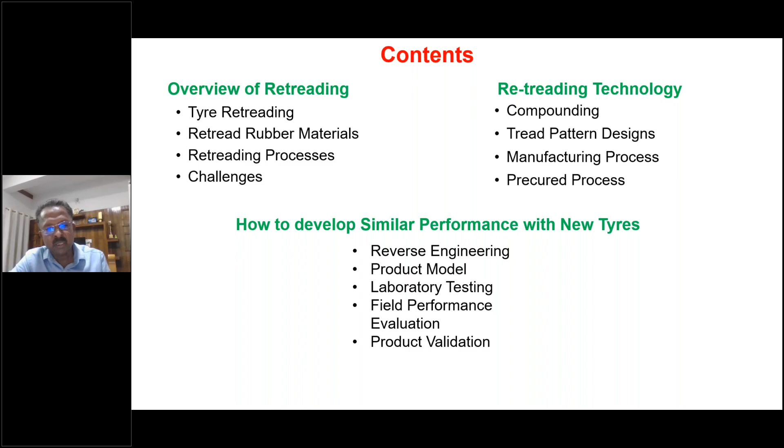In retreading, as you know, when a tire is worn out, maybe after 50,000 kilometers or even 1 lakh kilometers, we have two options: we can go for a new tire and replace it, or retread it—just replace the worn out portion of tread with a new piece of rubber, giving the tire a new lease of life. This process is called tire retreading, and the materials used for this process are called retreading materials.

The important retreading materials are: pre-cure tread rubber, which is fully designed and fully cured material; and hot rubber, an uncured slab material; and bonding gum, a thin layer of rubber film; and of course the solution and tire patches.

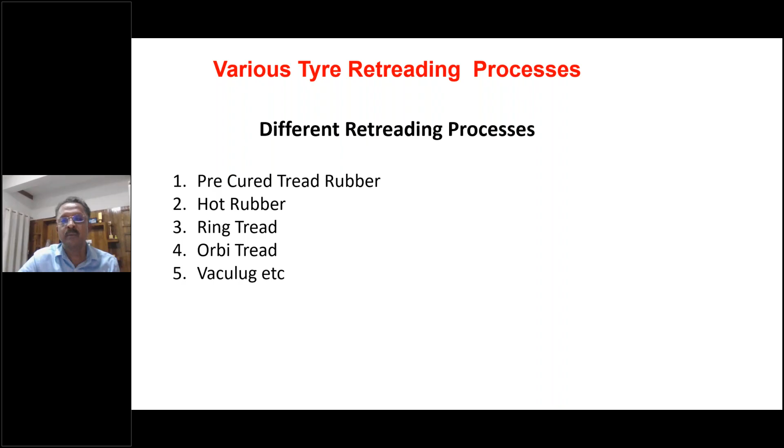There are different retreading processes: pre-cure tread process, hot rubber, ring tread, orbi tread, vaculug, etc. In the pre-cure process, the worn out tire is first inspected for defects, and it is buffed to remove the old tread pieces. After buffing, we apply a cement solution to the surface. Then after drying the cement, we place the pre-cure tread, a long piece of tread, and it is cured in an electric chamber or steam bonder.

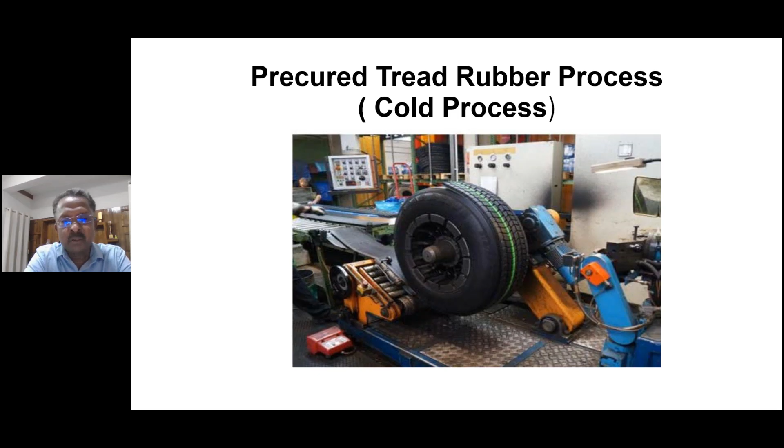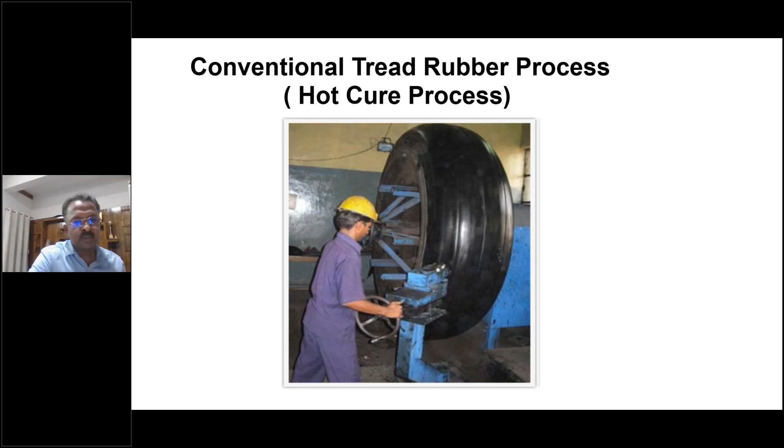In the hot cure process, the difference is there is no design—it's uncured material, not cured. It's a hot process because it needs more heat compared to the pre-cure process, which is a cold process.

Ring tread: the difference is we are placing a ring-shaped tread over the tire casing, so no splice is required.

Orbi tread is mainly used for OTR tires, big tires, where a small strip is extruded and wound over the buffed tire casing to the required dimensions, and then it is cured similar to hot rubber.

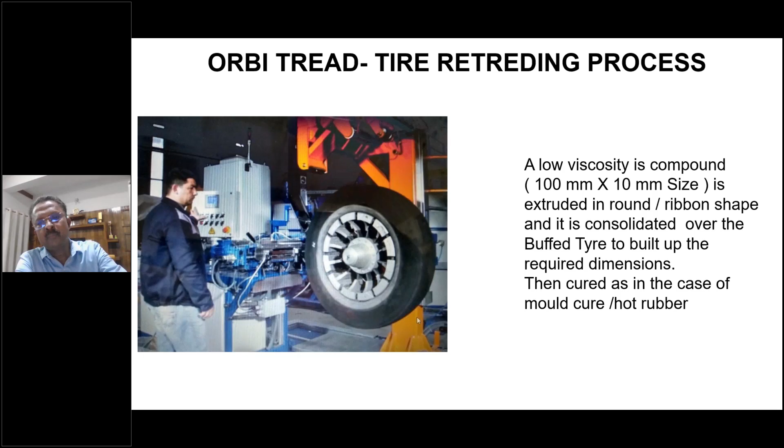Vacu lug is similar to hot cure. The difference is we are using segmented molds, so you get better uniformity.

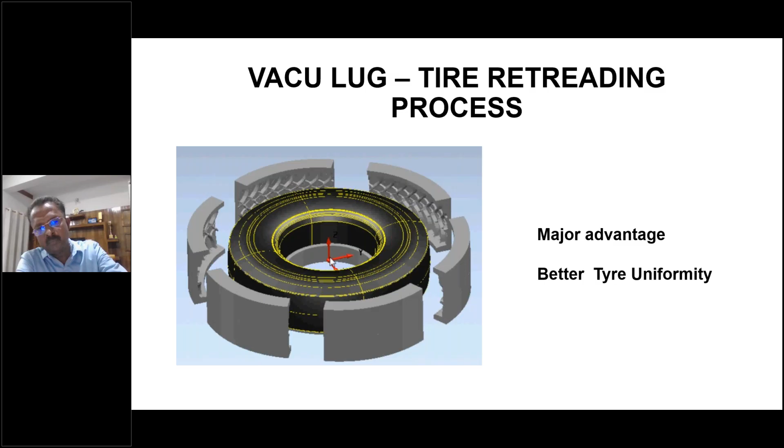Now the challenges in retreading: belt separation, ply separation, tread lift, channel crack, chipping, cutting, low mileage, and cost.

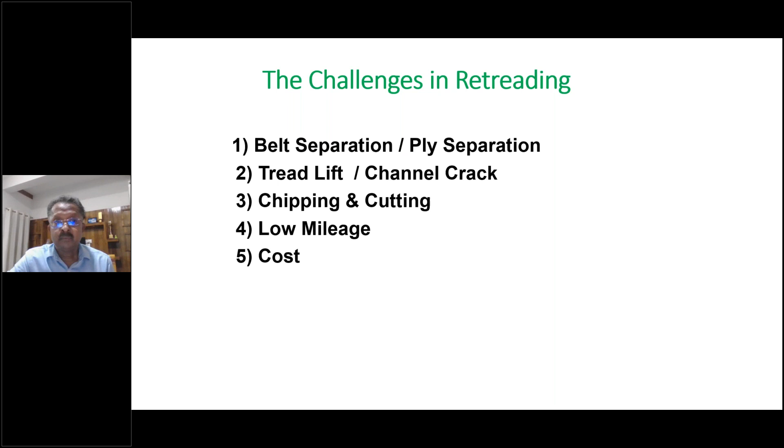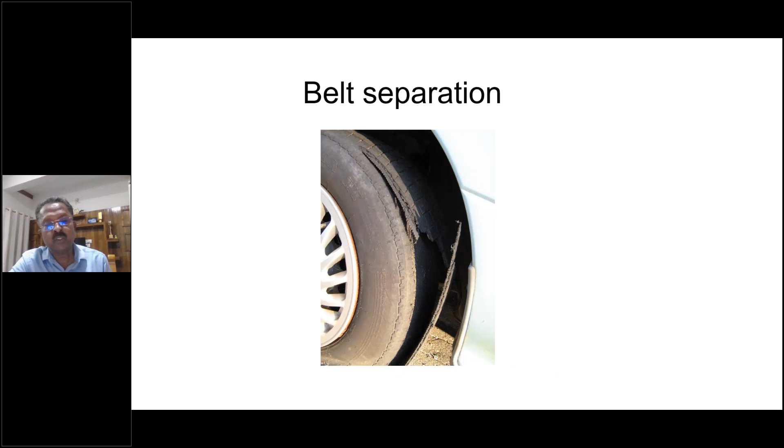Tread separation: the tread is totally separated from the tire. Belt separation: the belt gets separated. This includes breaker, inner ply, and outer ply separations.

Buttress crack: the crack develops at the buttress of the tire. Channel crack is the main complaint for retread rubbers.

A crack develops in the groove and it propagates around the entire circumference of the tire, and finally the tire gets separated.

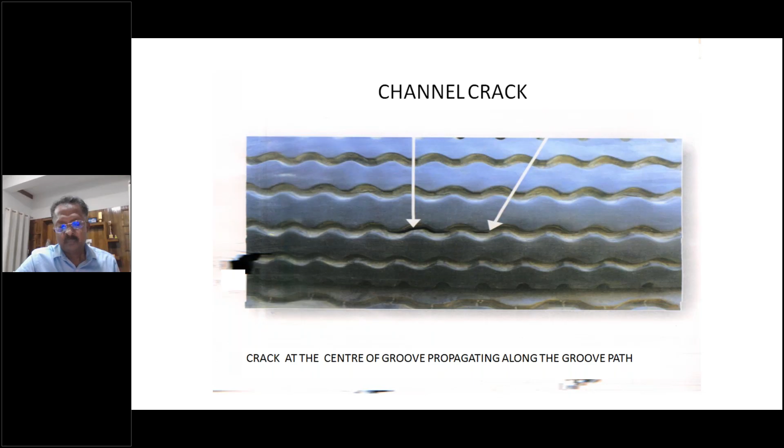Then there is tread shoulder separation and subsequent burst. If shoulder separation is not noticed, the tire will subsequently burst.

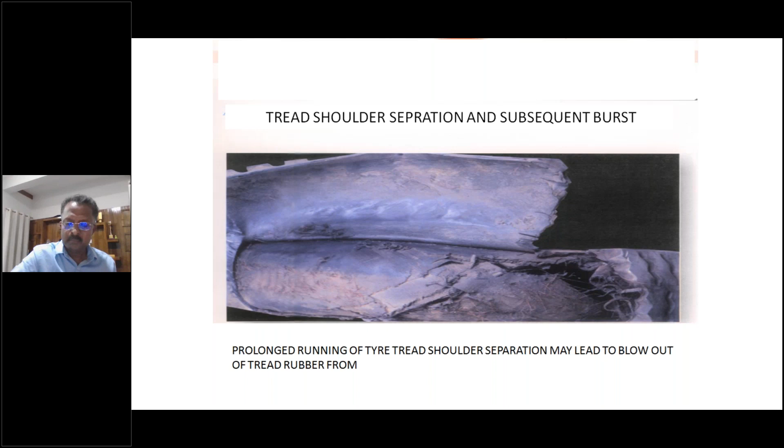Because of these aspects, even today, retread rubber faces challenges in the market in the following applications: long haul applications, where tires running long distances may fail; non-stop applications; and trucks carrying perishable goods like agricultural produce—apples, pineapples—where people travel long distances without stopping.

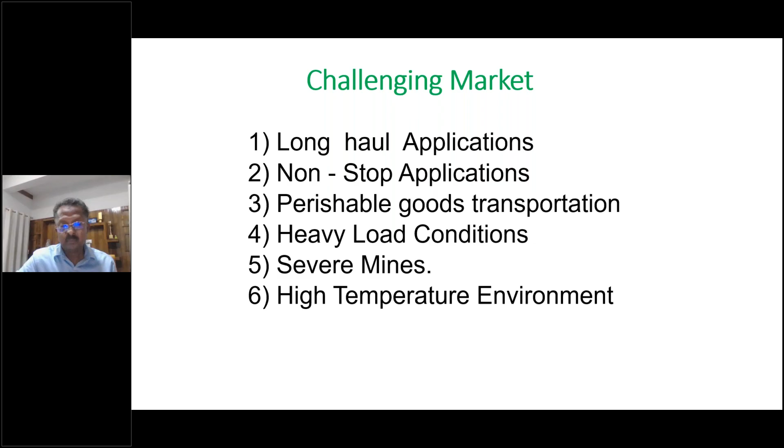And in heavy load conditions, there is risk—severe mines as well as high temperature environments. So for these applications, even today, retread tires are not preferred by all customers. These are the major reasons for retread failures.

So I classify into 4 aspects: one, the tire inspection failures, the quality issue of tread rubber materials, the retreading process failures, and tire vehicle operational issues. See, the inspection part.

The tire before retreading, we have to inspect properly whether the tire is retreadable or not. If the tire has major complaints, we have to stop. We are not supposed to retread it. If a tire retreaded having earlier defects, it may lead to problems. So the inspection is very, very important.

Maybe small cuts, air entrapments, if unnoticed, may aggravate after running, after retreading. Similarly, incorrect tire patch or even repairs that are not perfect may lead to retread tire failures.

And quality issue of retread materials: the selection of tread rubber size, its dimensions, type, compound, excess heat buildup. Generally in India, retread rubbers have good mileage potential, but the tires don't run for long distances because of excess heat buildup. Bonding issues, bonding gum reversion, poor tack of bonding, cement contamination - these all will lead to retread failures with respect to tread rubber material quality issues.

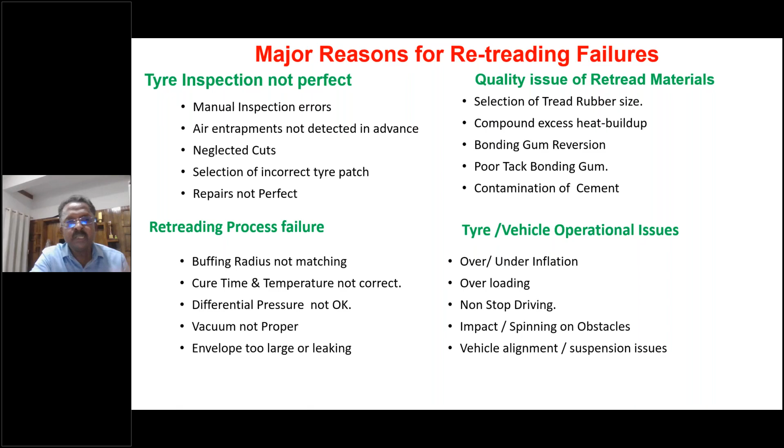Similarly, tire and vehicle operation issues: overinflation, underinflation, overloading, non-stop driving, impact, spinning on obstacles. Sudden impact on objects will cause failures. Similarly, suppose the tire is stuck on an object - if we accelerate, the tire will spin there itself, creating high heat and quality issues, alignment issues, suspension issues. So these are the issues for retreading failures.

Retreading technology applies the right combination of science, engineering, and art to develop a successful product meeting customers' requirements of cost, quality, and sustainability. It has three aspects.

It's the science aspect - the science of raw materials, the structure-property relationship of raw materials, the raw materials' physical and chemical characteristics. It has a great impact on product quality. Then engineering of process, the engineering of machineries, also has a very good impact on product quality.

And more important, the art of making the product. So these three aspects we have to combine to make a successful product. So retreading technology has these aspects: rubber compounding, tread pattern designs, manufacturing process, the retreading process, and of course education, training, and applications. Still, the awareness of people regarding retreading is limiting its usage in the industry, so a lot of education and training is required in this aspect.

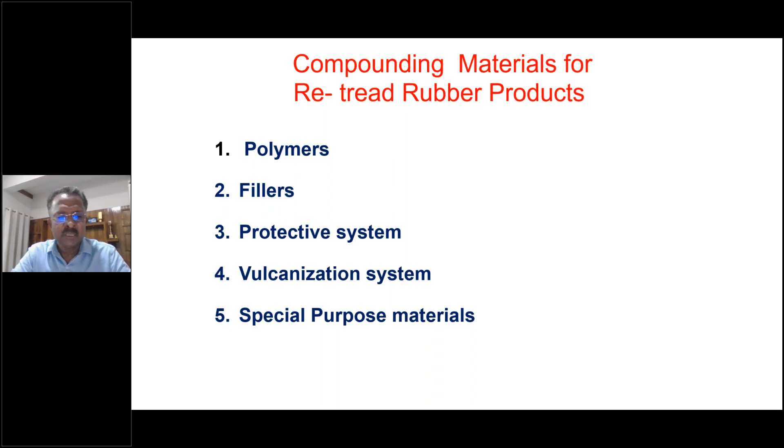Compounding - I'll cover a brief of compounding. The rubber compound basically contains polymers, fillers, protective systems, vulcanization systems, special purpose materials. For retread materials, for tread rubber, we can use natural rubber or a blend of natural rubber with SBR or PBR for a tri-blend. Mostly for highway application, we prefer a blend of natural rubber and PBR.

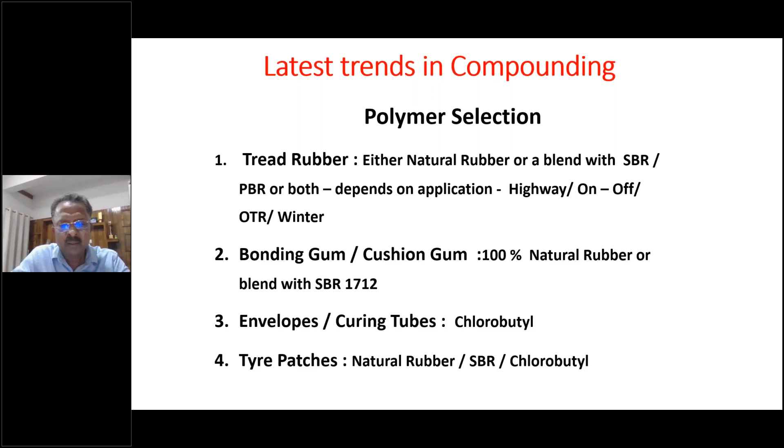Reinforcing fillers - these are the strength-giving materials, responsible for giving the tire strength. So for tread rubber, historically people used N330, N339, N220, and recently N234 blacks.

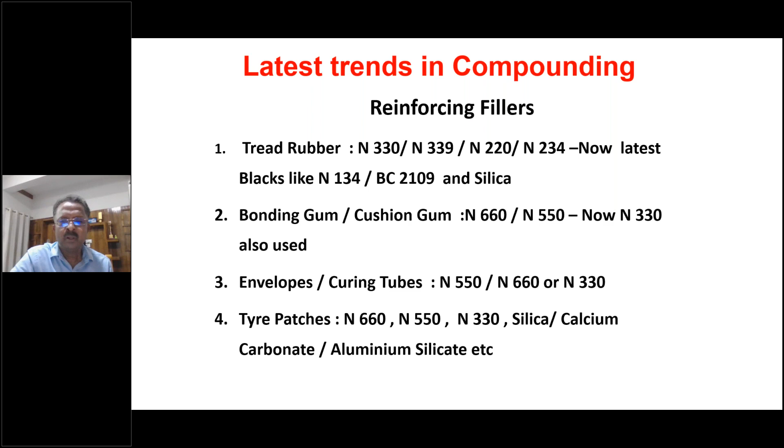And latest blacks like N134 we can use, or BC2109, or even silica we can use as reinforcing fillers for tread rubber. For bonding, mostly people use N660, N550, and we can also use N330. Envelope and curing tubes use N550.

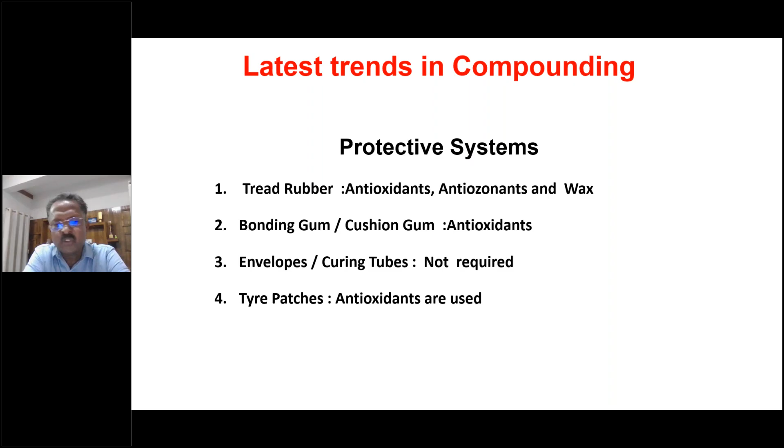Protective systems: for tread rubber we use antioxidants and wax. Bonding and cushioning mostly use antioxidants. Envelope, as it is chlorobutyl based, doesn't require it. Tire patches, antioxidants are used.

Then vulcanization systems. For vulcanization, it's always better going for low sulfur systems for tread rubber. Low sulfur systems will give you mostly monosulfidic crosslinks. Monosulfidic crosslinks means the link contains only one sulfur atom - this is more stable towards heat resistance.

And for bonding, for getting good bonds and storage life, we use insoluble sulfur. Envelopes normally use sulfurless curing, no sulfur. Tire patches use ultra fast accelerators, and even room temperature curing systems are used for tire patches.

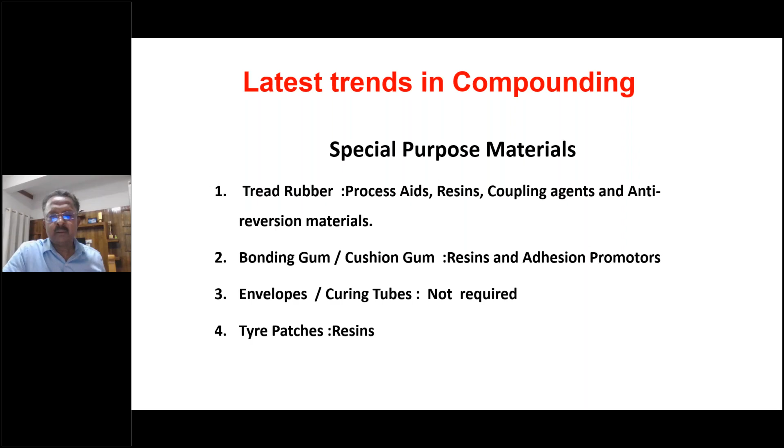Process aids or special purpose materials. There are materials like coupling agents, such as silane coupling agents, or anti-reversion materials used for tread rubber to get more life. Also bonding resins and adhesion promoters for getting better bonding.

Tread rubber quality has three aspects. One is the quality of the tread rubber material. Second is the quality of the retreading process. Finally, the application and operating conditions of tires.

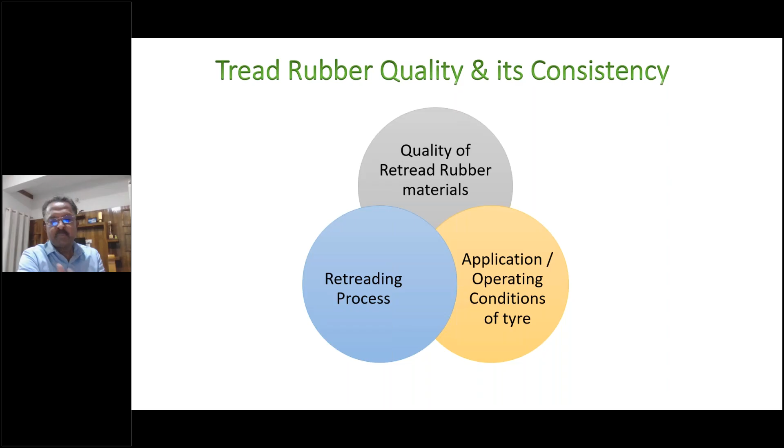The same tread rubber, same composition, put into two applications. On the highway drive application, long highway driving, it gets 100,000 miles, whereas a city driver gets only 10,000 miles. Same material under different conditions: one is non-stop, plain road, normal load, low temperature, leading to good mileage. The same material under different conditions results in one-tenth of the mileage. So mileage is a highly complicated phenomenon, depending on a lot of factors.

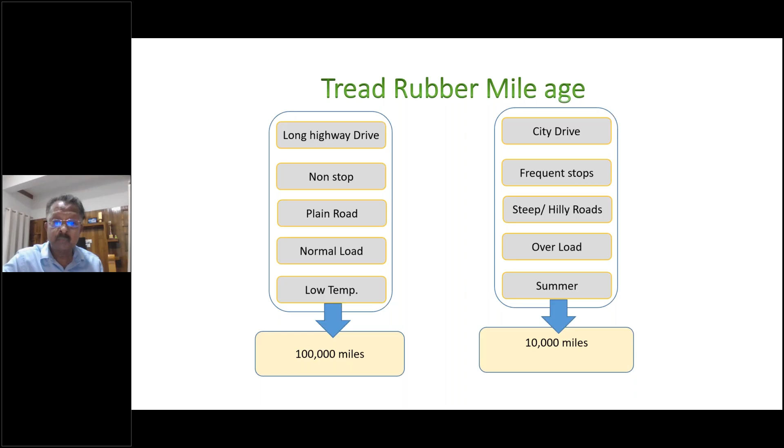The factors influencing tire wear are: driving conditions, road conditions, vehicle conditions, tire conditions, and design elements. In driving conditions, even with free rolling, tire wear is basically because of slip. Slip means the relative movement of the tire surface and the road. If there's relative movement between the tire surface and the road, slip happens, friction happens, resulting in tire wear. When accelerating or braking, the slip is chronic. Even in cornering, slip is more. Road conditions include plain, hilly, and off-road.

Vehicle conditions include load of the vehicle, speed of the vehicle, alignment, and suspension. Tire conditions include inflation pressure, temperature, sidewall stiffness, and belt stiffness. These are complex parameters affecting tire wear. The design includes tread element shape, tread block arrangement, and tread block interlocking. All these aspects directly influence tire wear.

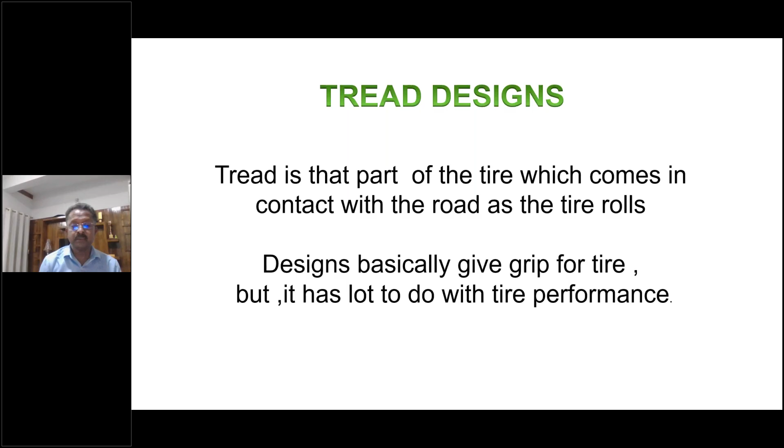Tread designs: compounding was the first aspect leading to tread performance. The second most important aspect is tread design. The tread is that part of the tire which comes in contact with the road surface where the tire is rolling. The design basically gives the grip for the tire. There are a lot of other parameters with regard to tread designs, including the type of tread design: rib designs, lug designs, and rib-lug designs.

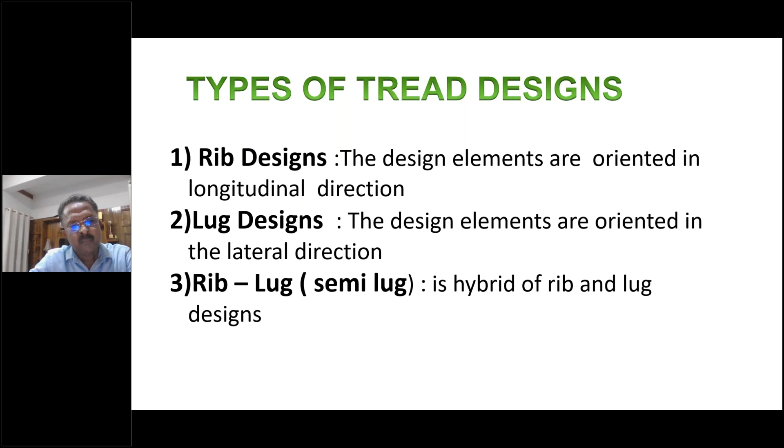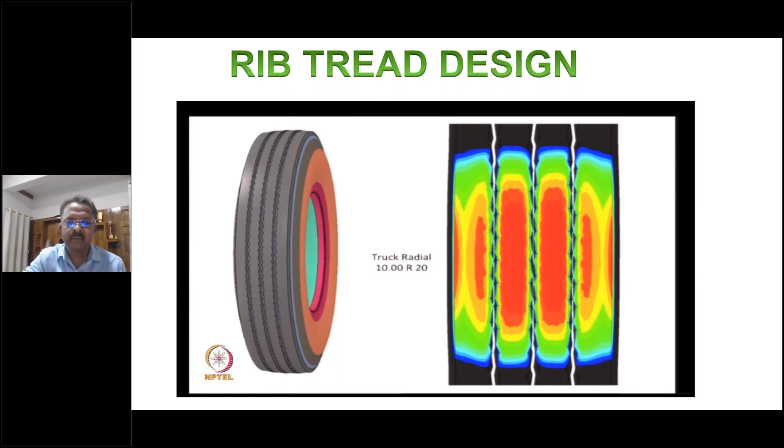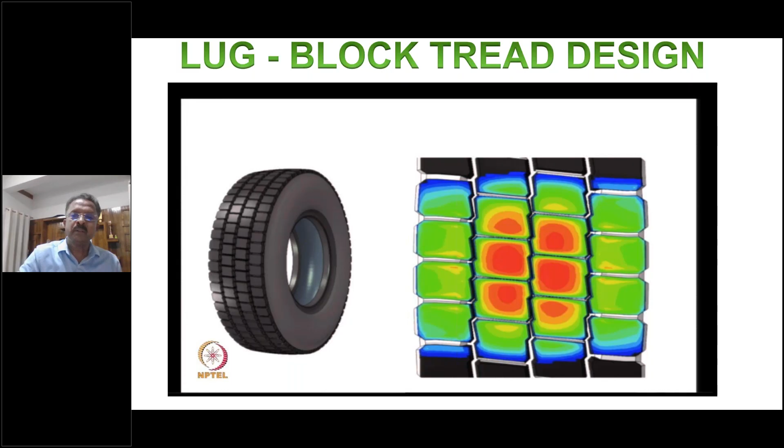Lug block design is where the tread elements are oriented in the lateral direction, giving better lateral stability and traction. So it's mostly used in traction wheels or rear wheels. Rib-lug or semi-lug is a hybrid of both rib and lug designs.

Let us briefly examine the tread design criteria for tread design elements and tire performance parameters. In tread design, the parameters are: sea-land ratio, void ratio, groove depth or non-skid depth, groove width, pitches, sipe width, sipe angle, sipes, sipe density, block arrangement, size and shape of tread elements, and interlocks of tread elements. So these are the tread design criteria and design elements.

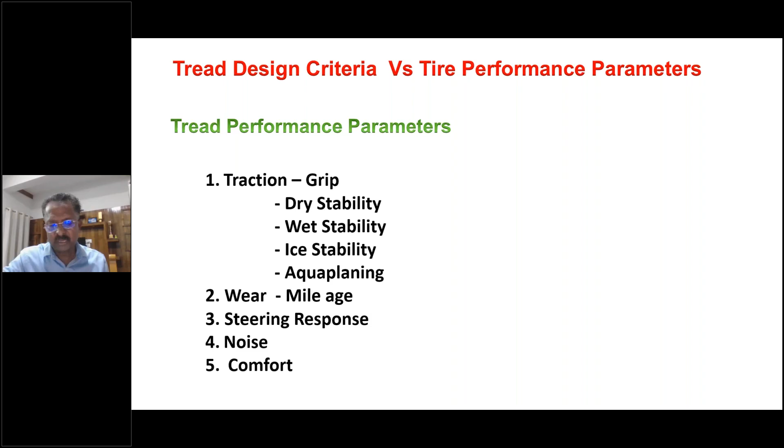These are the tread performance, tire performance parameters: traction, grip, dry stability on dry roads, wet stability on wet roads, ice stability on ice roads, aquaplaning, tire wear, mileage, steering response, noise, and comfort. So we can correlate the tread design elements' impact on tire performance. That's it for tread design criteria versus tire performance parameters.

Void ratio: the void ratio, the sea-land ratio, or the net contact area are all almost similar or related terms. The higher the void ratio, what happens? The net contact area becomes less, so the load is distributed on a lesser contact area. This leads to higher intensity of contact pressure on the contact patch, which leads to a higher wear rate. So high void ratio leads to low mileage.

Aquaplaning is when a tire is running on a wet road, and a water film is formed between the tire and the road surface.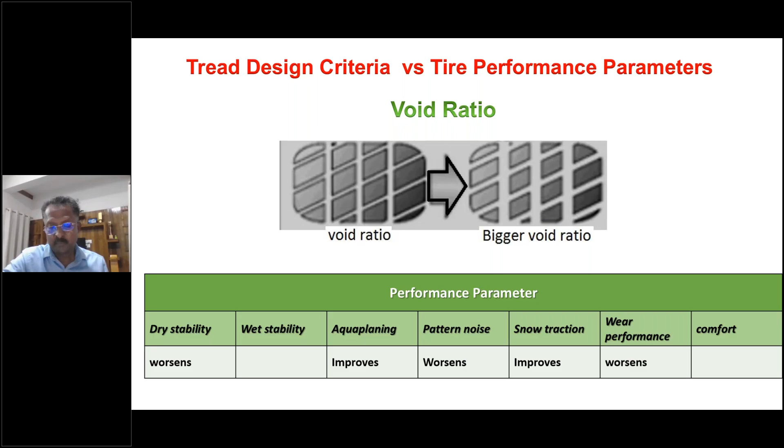So normally, the net contact area for different application tires: highway steer and trailer tires, 75 to 85% is the net contact area, or the sea-land ratio. For highway drive axle, 65 to 75%. Mixed application, 60-70%. And OTR, it's 55-65%.

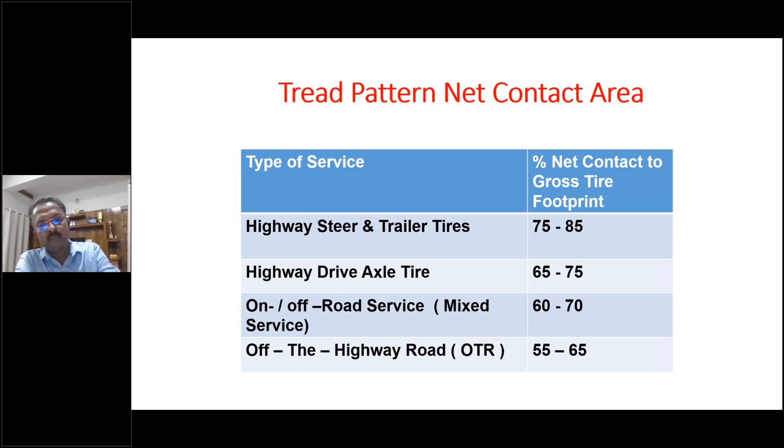The net contact area for different applications. And groove depth - we call it NSD, the non-skid depth. Naturally, as the groove depth increases, more mileage. Snow traction improves. Pattern noise worsens because more air is entrapped. Aquaplaning improves because the water can be drained off easily. Dry stability worsens.

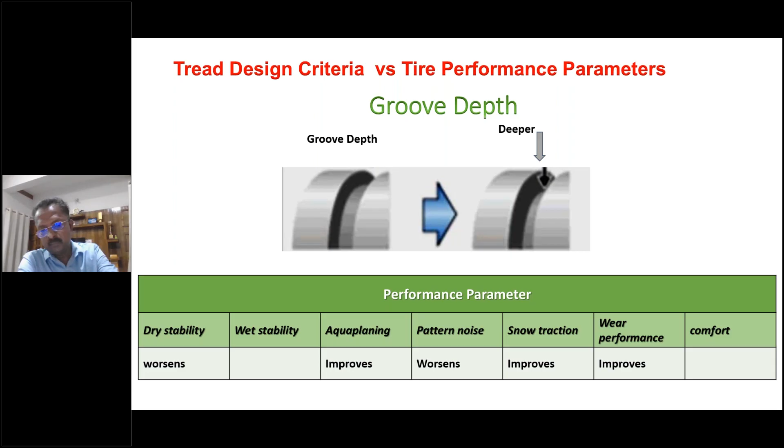Tread design groove depth, NSD, for the applications: highway application, NSD of 15-17 millimeters for steer tires, trailer tires. Highway drive axle tires, 17-20 mm NSD. Mixed application, 20-22 mm NSD. And OTR, big OTR tires, 22 to 50 mm, even more depth will be there.

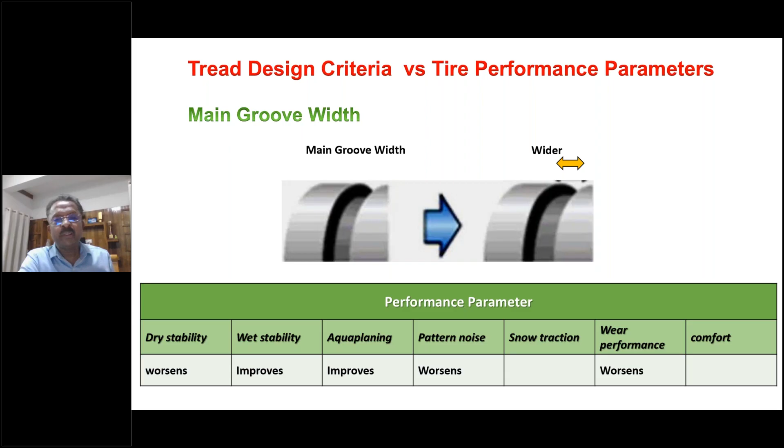Groove width. Similarly, as groove width increases, wear performance worsens, pattern noise worsens, aquaplaning improves, wet stability improves, dry stability worsens, when the groove width is increasing gradually. Number of pitches: more number of pitches, naturally snow traction improves, pattern noise improves, dry stability worsens, comfort improves.

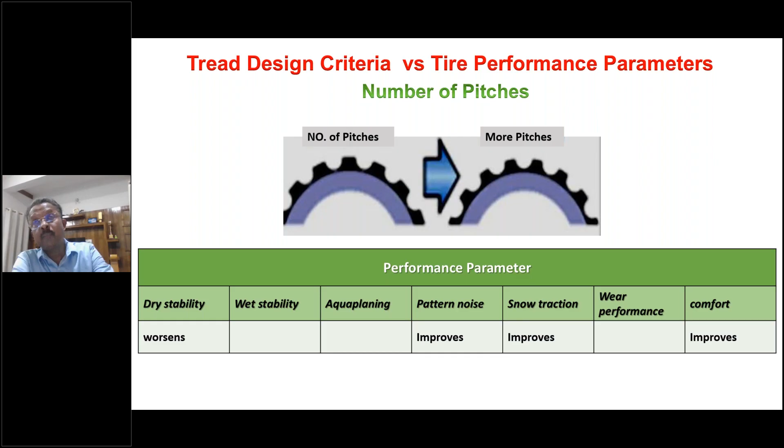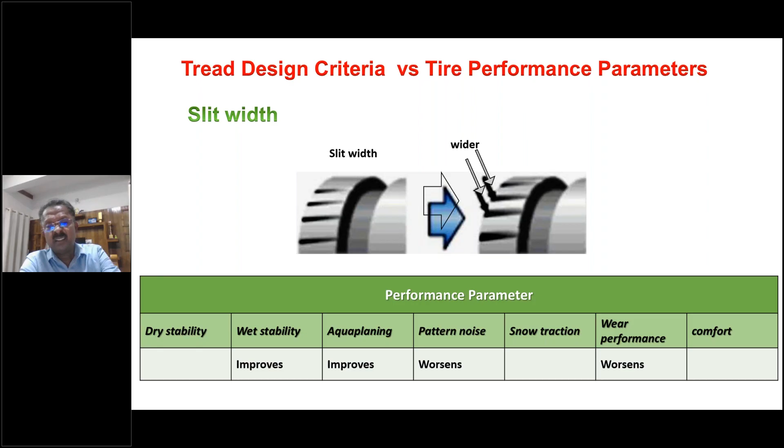Slit width: wider slit widths, wear performance worsens, pattern noise worsens, aquaplaning improves, wet stability improves. Slit angle steeper: the wear performance improves because it provides less resistance to tire while running.

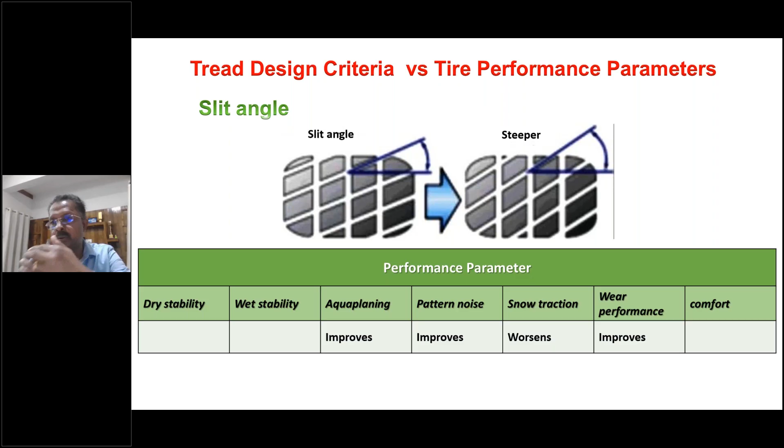Sipe density: snow traction improves, pattern noise improves, wet stability improves, dry stability worsens. And block arrangement - the careful block arrangement is basically for the noise control.

Looking at the tread block arrangements: if the tread blocks are interlocked, meaning one tread block is surrounded by other blocks, there's a tie bar between the blocks. It will resist the tread element squirming, and will not allow the tread to vibrate while running on the road. This reduces squirming and reduces tire wear.

And geometry of tread block - most important, the geometry of tread block. The geometry of tread blocks should be such that when the load is coming, the tire is compressing on the footprint. Rubber is not compressible, rubber doesn't compress - it expands to different areas. So we design the tread block geometry, the shape, in such a way that when the tread is compressed to the footprint...

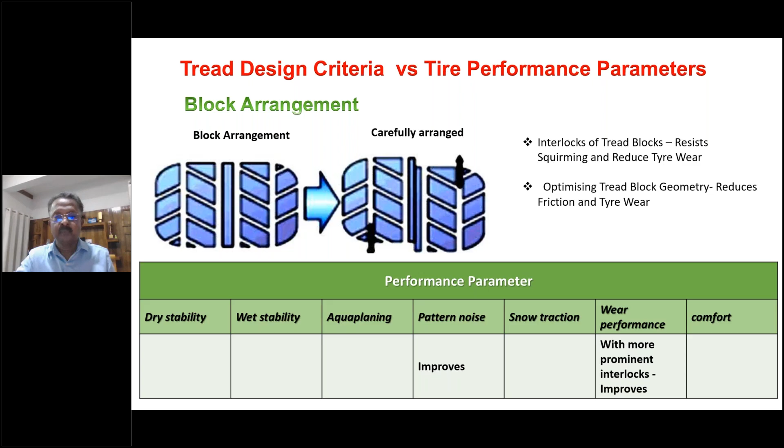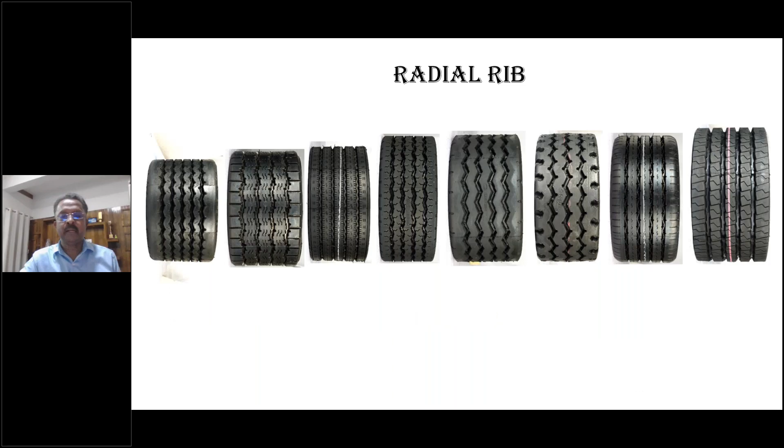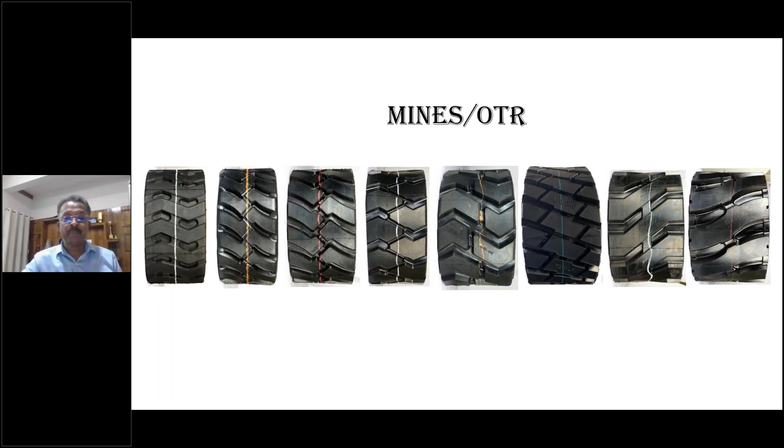Bonding is a very, very important material for retreading bonding. For example, for a 12 kg tread, the bonding is about 1 kg, 1.2 kg. The main purpose of bonding is to bond the new tread with the old casing. It's a very critical material in tire retread.

Based on rate of cure, bonding is classified into 3 different categories: normal curing bonding, fast cure bonding, ultra fast curing bonding. Based on cure rate, we can reduce the cure time in the electric chamber or cure time of retreading. At the same time, as the cure rate increases, the shelf life reduces.

Bonding performance properties: softness - bonding should be soft, so we have to control the viscosity and specific gravity.

Tackiness has 2 aspects: adhesion and cohesion. Adhesion is a surface phenomenon - adhesion of the bonding surface to the tire surface. Cohesion is the intrinsic strength within the bonding molecules. We need both for getting good tackiness - good adhesion, good cohesion. Stretching: people need to stretch bonding during retreading.

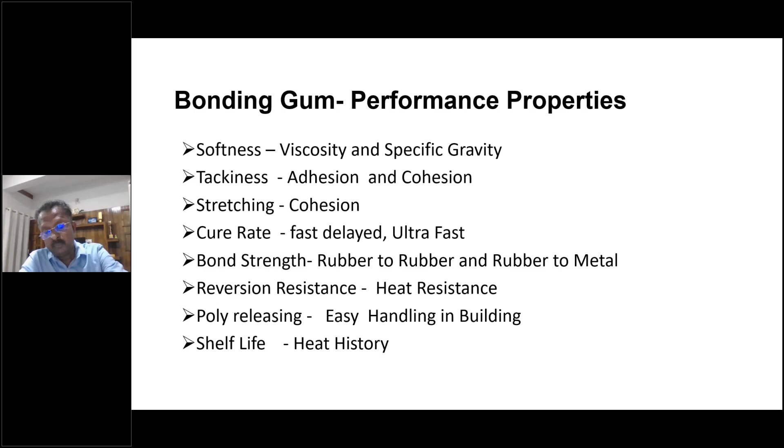Manufacturing system, mixer automation. So we have covered compounding aspects, tread design aspects, and bonding characteristics. Now the manufacturing system, mixer automation. Mixing is a very critical process in any rubber good manufacturing.

Basically, we classify mixing ingredients into 4 categories: rubbers, carbon blacks, oils, and chemicals. Rubbers are in different geometrical shapes, physical states. So we have to mix these materials into a homogeneous mass.

Mixer automation - automatic selection, feeding, weighing, and mixer control - will give you very good consistency in mixing, very good batch to batch consistency in mixing. It will give you very good product.

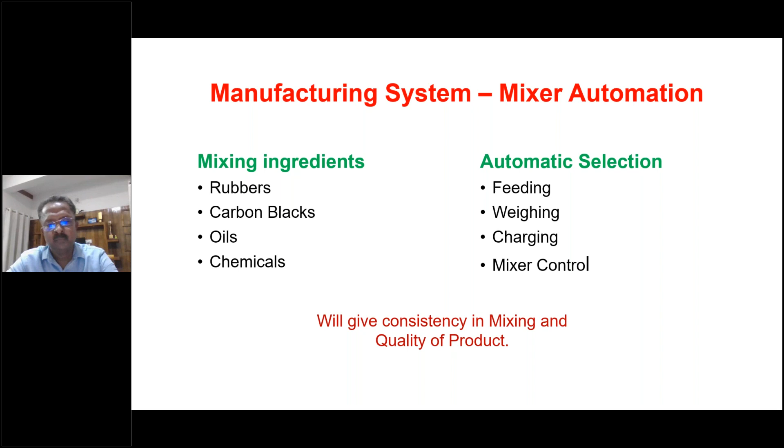And manufacturing process innovation. See, normal conventional manufacturing process has got 4 to 5 stages: mastication, master batch mixing, repass mixing, final mixing, extrusion, then curing.

See, we can undertake all the 5 processes in a single stage: simultaneous mixing and online extrusion. So it will give you a lot of energy saving, huge savings in machinery, manpower, energy, time, but lead to good quality also. See, every stage, mastication, we are mixing rubber.

The rubber molecules undergo shear. It is broken into pieces. Master batch - again it is getting heated. Master batch, repass - again the rubber is getting heated. Final batch - so every stage, the rubber's molecules are heated up. So heating will kill the molecule's strength.

So simultaneous mixing - master batch, final batch, and extrude simultaneously. Aging we can give at the end of the cycle. Not necessarily should we give aging at every stage; give aging at the end of the cycle. Basically aging is given for the molecules to get back into the original stage.

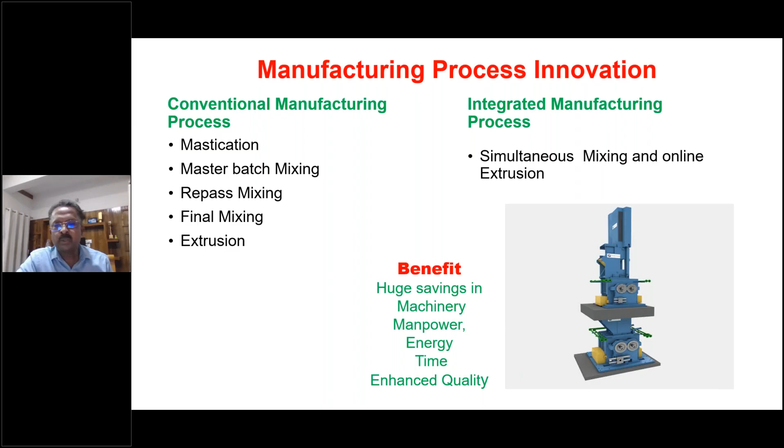Next is the retreading process. So retreading process is very, very critical. This is a retread chamber, electric chamber. The man is loading the built-up tire into the chamber. So people use different conditions.

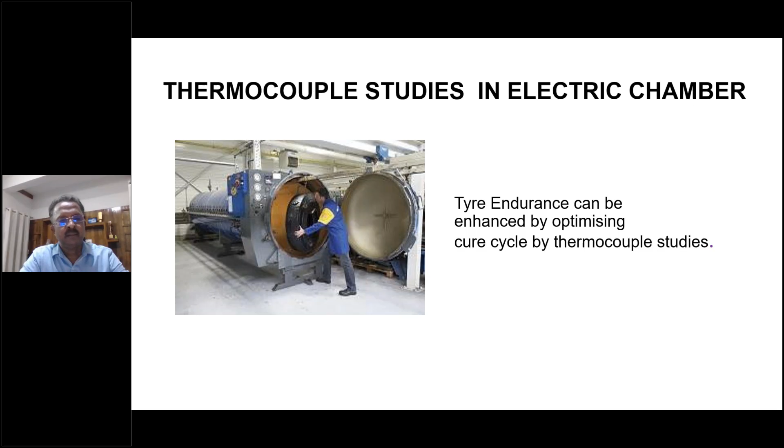So we can optimize the cure time and temperature by thermocouple studies in the electric chamber. Let's see - the steps: you set up a reference temperature, maybe 125 degrees centigrade, the normal temperature of retreading, develop an equivalent cure chart, and find the blow point of bonding.

Second, chamber temperature is set at 125 degrees. The bonding temperature initially is cool inside the tire, so the temperature has to reach the bonding, covering the tread rubber section to the bonding point. So initially the temperature is very low, then gradually it picks up.

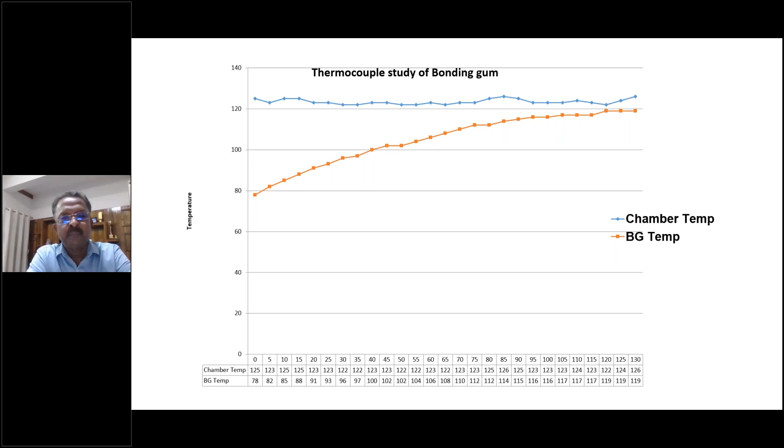And after curing, just peel up the tread and see the bonding - whether the bonding is proper or not, no porosity, no sponginess.

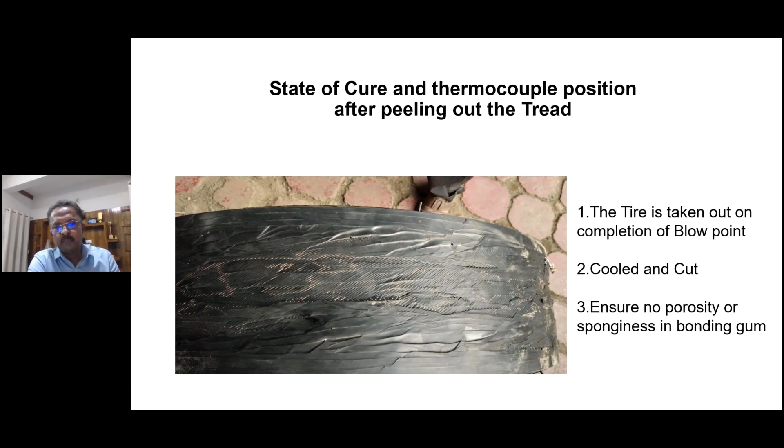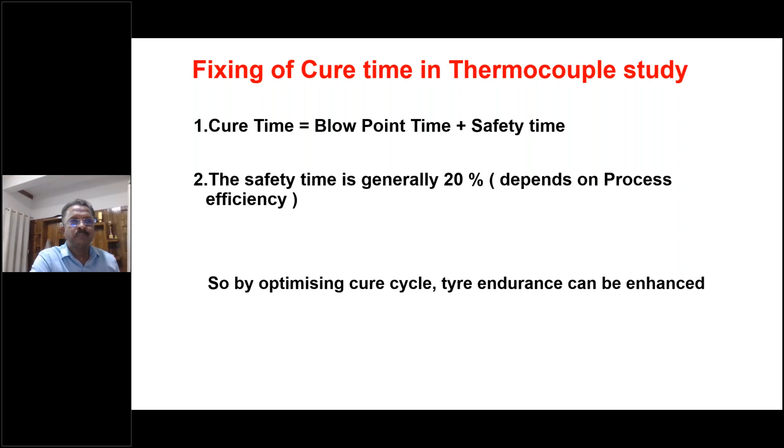And normally the cure time is set as the blow point time plus safety time. Normally 20% is given as safety. Suppose the blow point time in the curing chamber is 1 hour, you put 1.2 hours.

Now this is a case study conducted over 3 years to develop retreaded tires of similar performance to new tires. The development study had 5 phases. The first is reverse engineering.

Extended reverse engineering done on new tires of all leading brands, including international brands, as well as competitors. Extensive reverse engineering. And based on the output of reverse engineering, we made a product model.

The product model was analyzed in the internal laboratory as well as external laboratory. Then sample products were put into tires and the field performance evaluated in comparison with new tires.

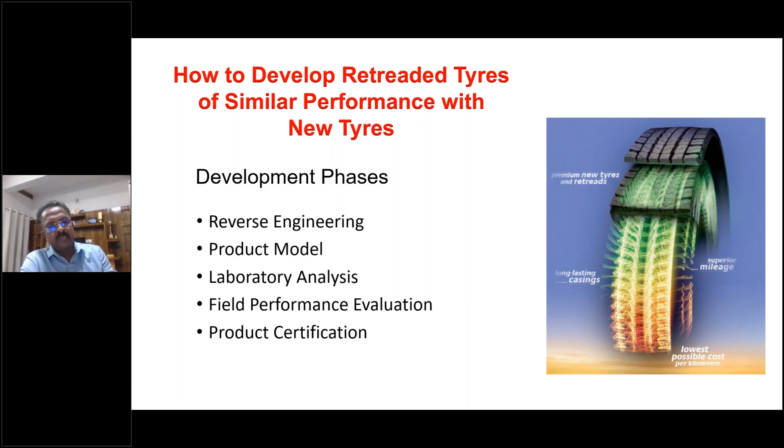Then finally, external verification was done for product validation. So we'll slightly describe these 5 stages - the reverse engineering techniques for tire composition.

These tools are used for reverse engineering for identifying the tread composition: FTIR, TGA, DMA, physical mechanical analysis, and chemical analysis. By these 5 analyses, we can arrive at almost 99.99% of the compound composition - what kind of rubber, what kind of carbon, fillers.

Let's see FTIR. FTIR is mainly used for the chemical composition of substances. Every chemical composite has got typical peaks, so a typical NR spectrum is given.

From this analysis, we can identify the polymer nature - whether the compound contains 100% natural rubber, or a natural rubber-PBR blend, or natural rubber-PBR-SBR blend, or PBR-SBR blend. So we can identify the polymer content - what kind of polymer is used for tread rubber tire from FTIR.

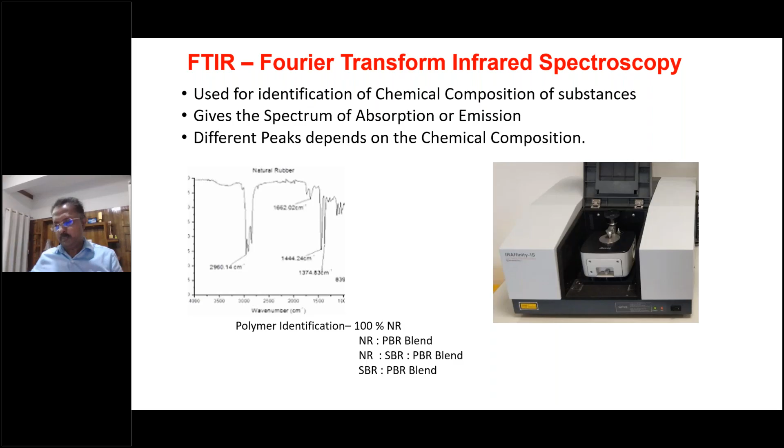FTIR is mostly done in rubber. And TGA, thermogravimetric analysis, measures how the mass of a material changes over temperature.

In a rubber compound, we have different rubbers, carbon black, zinc oxide, stearic acid, antioxidants, accelerators, wax, sulfur, and lots of other things. These materials decompose at varying temperatures, so in TGA we measure the mass change over time and temperature.

From this analysis, we can determine the rubber hydrocarbon content. In the first part of the graph, you can see the 13% is basically volatiles. Volatiles are mainly antioxidants, accelerators, stearic acid, sulfur, oils, etc.

Then comes the polymer. Different polymers have different decomposition peaks. For natural rubber, it's 370 degrees centigrade. For SBR, 450 degrees centigrade. For PBR, 420 to 460. So from TGA, we can find the rubber hydrocarbon content and polymer ratio from the area under the graph.

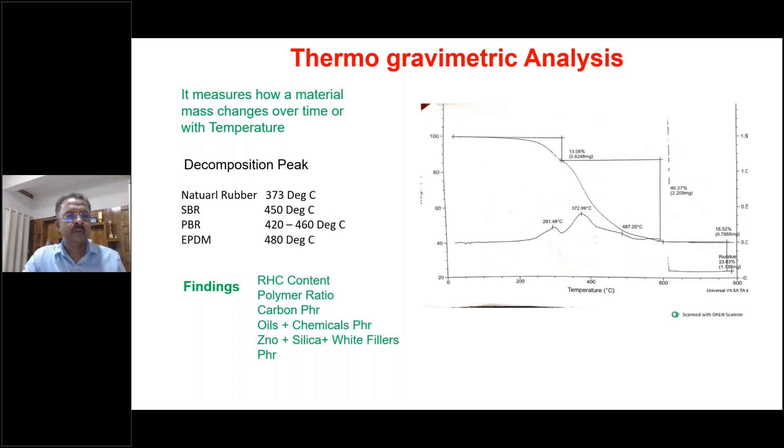DMA analysis is the most important analysis in tire rubber. In DMA, a cyclic sinusoidal stress is applied on the sample. You can see the pictorial representation of DMA. The force generator at the top applies a sinusoidal stress at a frequency of 10 hertz.

10 hertz means it will move 10 times in a second. This is almost similar to tire operation. A tire running at a speed of 120 kilometers per hour will have around 10 hertz cyclic compressions.

And we can change the temperature, setting the cabinet temperature normally from 20 to 110 centigrade, similar to normal tire operating temperature. Strain means the extent of deformation. Normally a tire deforms around 10-15 millimeters while compressing on the road contact, so we took 1% dynamic strain.

From this analysis, we can find out the complex modulus, elastic modulus, and tan delta.

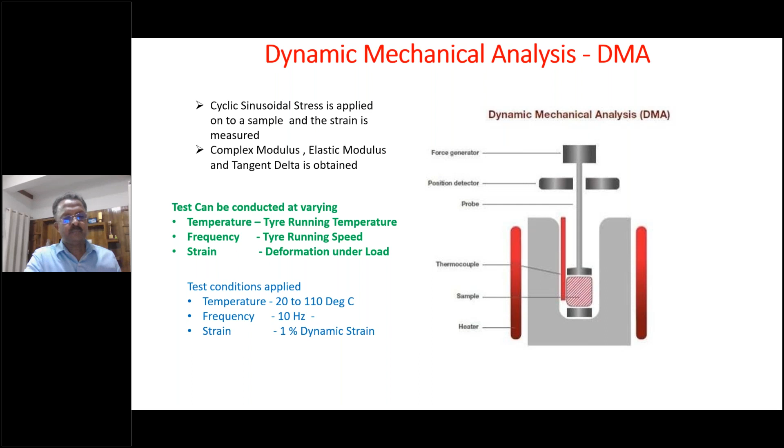The tire operates within the elastic region, the third region. Normally, a low tan delta at 100 degrees leads to low heat buildup. And a low tan delta at 60 degrees indicates low rolling resistance.

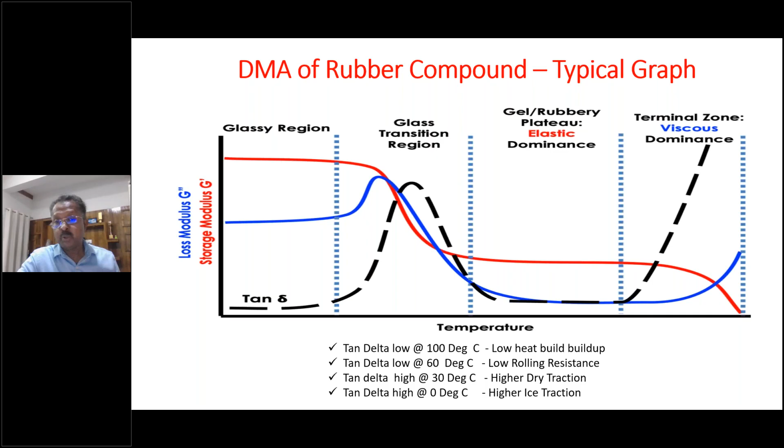A high tan delta at 30 degrees means high traction, and again a high tan delta at 0 degrees means high traction. So tan delta is the most important parameter for tire performance evaluation with regard to heat buildup, mileage, rolling resistance, and traction. It's a very important parameter for rubber compound analysis in tire rubber applications.

So we made products and tested them in almost all major laboratories, analyzing all properties - rheometric properties, viscoelastic properties, viscosity, mechanical properties, everything.

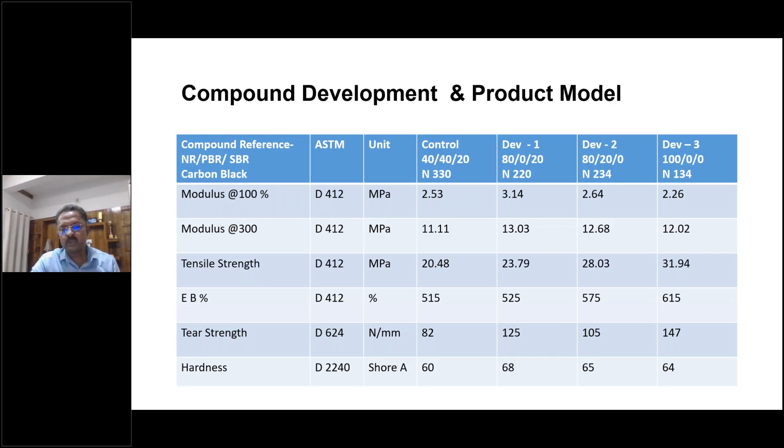So the properties measured are modulus at 100%, modulus at 300%, tensile strength, elongation, tear strength, hardness, then cut chip resistance - a very important property - the diameter loss,

abrasion index, ARI, heat buildup, and demattia cut growth resistance. This is a very, very critical parameter for tire performance. It has a very good correlation with tire performance and tire mileage.

Demattia cut growth resistance - what we are measuring is how many kilocycles of flexing are required for a cut growth from 2mm to 12mm.

See the last compound: 100 kilocycles. The first compound is 22 kilocycles. So the last compound has almost 5 times the cut growth resistance.

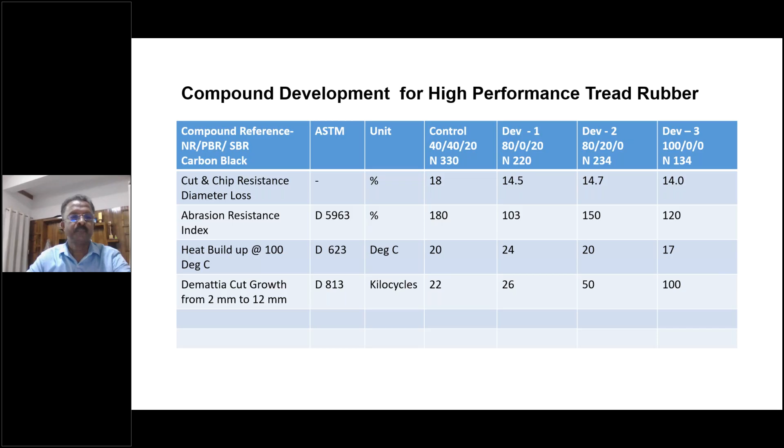The tan delta at 30 degree, 60 degree, 100 degree.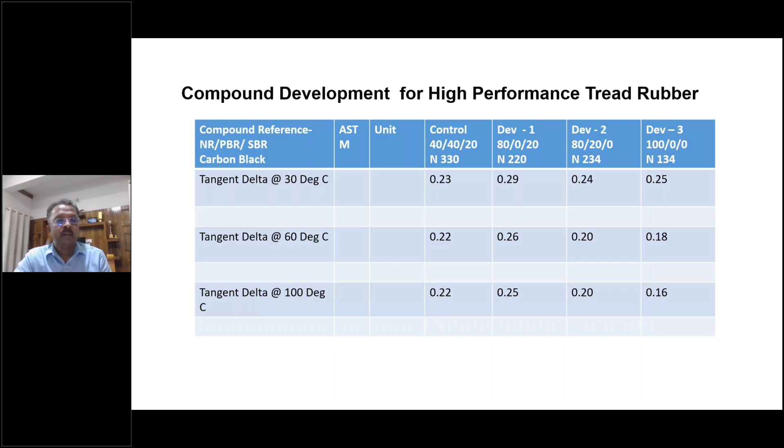Next is the field performance evaluation, based on the product model and the external laboratory testing. We made some products and tested them in trucks.

This is the testing for chipping and cutting resistance. The left one is a regular material, the right one is the development material. You can see the right one has clean tire wear, like glass. No chipping, no cutting.

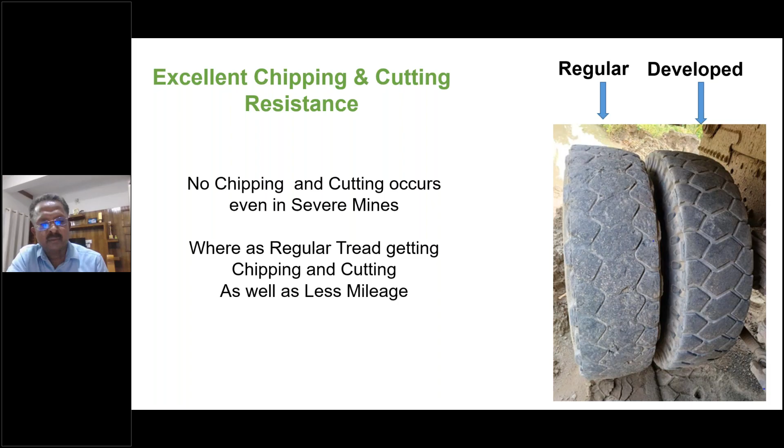This is the compilation of the field performance analysis conducted for various applications - vehicle application, pattern used. Pattern means the pattern semi-like 240 size. The development tire mileage is 1 lakh 3,791 kilometers, whereas the new tire is only 70,000 kilometers - 48% excess mileage.

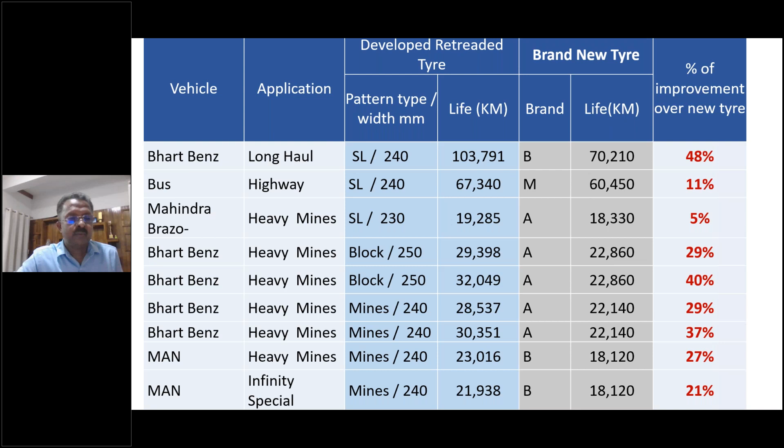Different applications - highway application, heavy mines - with different brands of new tires. In all field performance testing, the development tire got nearly 30-40% more mileage than the new tires. Then the last stage, based on the field performance evaluation, we got better performances, so we decided to have a third-party validation.

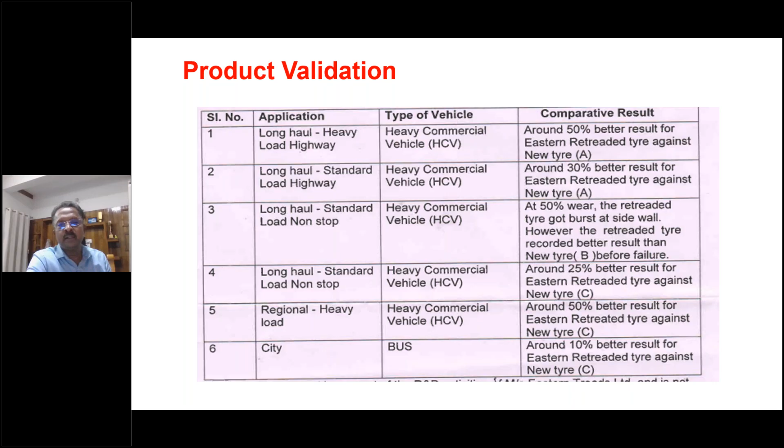For third-party validation, we made products with the development compounds and tested them against new tires in 6 applications. This was done by rubber board under supervision. In all applications, it got from 10 to 50% more mileage than the new tires.

This is the original certificate from rubber board, certifying better performance than new tires.

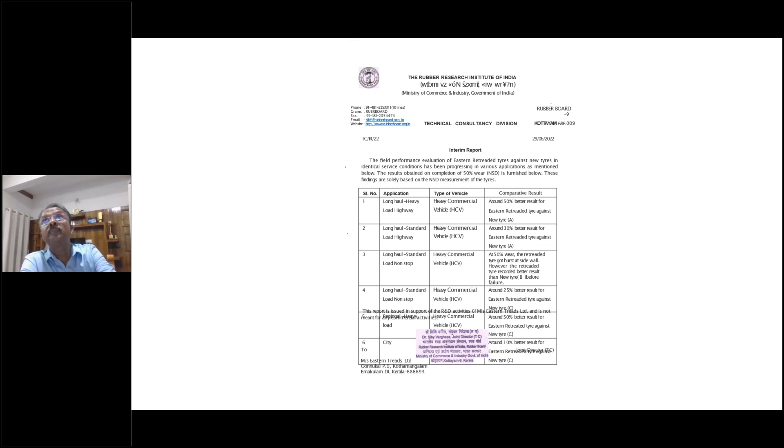So I will conclude how to develop retreaded tires of similar or better performance than new tires. We have 4 aspects: compounding aspects, tread design aspects, manufacturing system optimization, and thermocouple studies.

Compounding: we selected high performance carbon black and silica combination. The optimal filler loading is very important - the percentage loading of carbon is very important for tire performance. And low sulfur vulcanization, anti-reversion, filler coupling mechanism - these 4 aspects we applied in compound design.

Tread design for minimizing tread element squirming by giving interlocks between blocks, and uniformity in contact pressure distribution by providing the same buffing radius, required size, and optimizing tread element shapes for minimum friction.

And of course, the manufacturing system - mixer automation and process integration - and optimizing cure by thermocouple studies in the electric chamber.

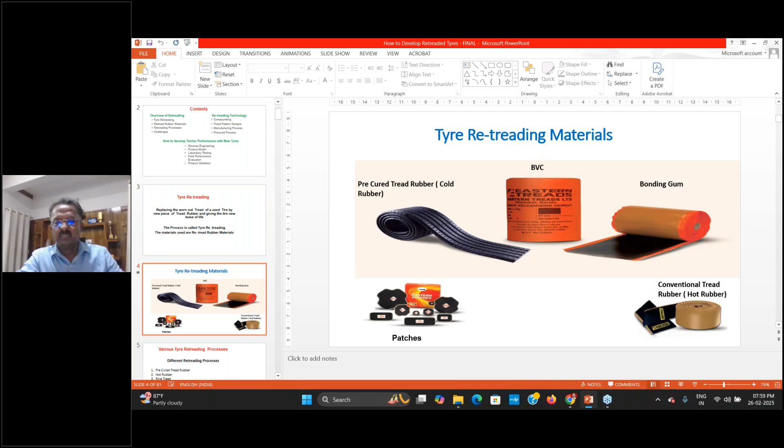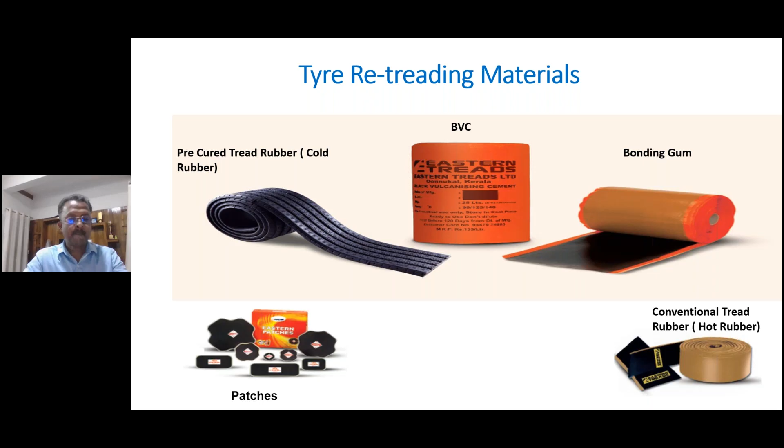Thank you for your patient hearing.

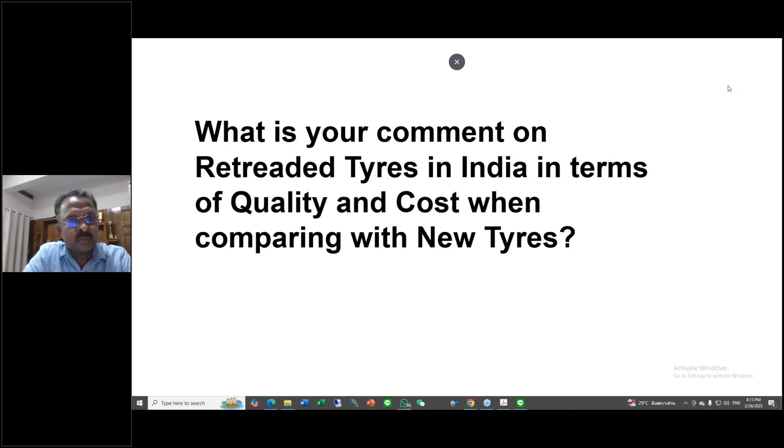For example, a new tire costs around 20,000 rupees. We can get a tire retreaded at a cost of 6,500 rupees with the same performance as a new tire.

In the USA and Western countries, about 80% of tires are retreaded. In India, still less than 50% of tires are retreaded, so there's scope for retreading to cover more tires - only 50% now compared to 80% in the US.

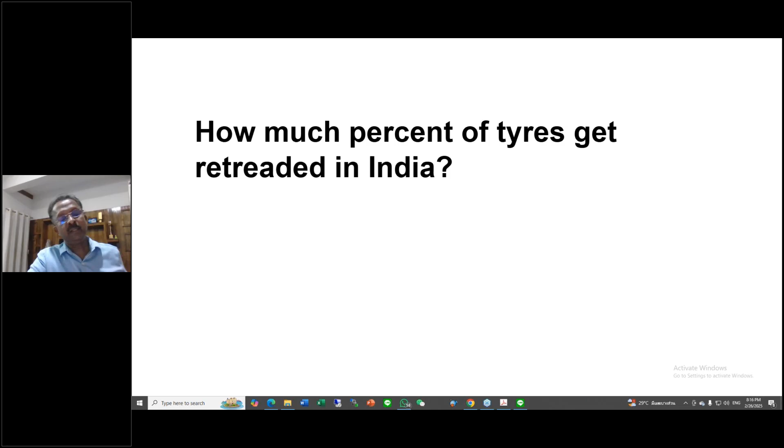The major difference between hot and cold processes: in the hot process, the material has to be kept for a long time, maybe 2 to 3 months, while the cold compound is used as and when needed. Basically the compounds are the same - the only difference is that in the hot compound we use insoluble sulfur for more shelf life; otherwise the compound is almost the same. Also, in the hot process we have to maintain slightly lesser viscosity. Otherwise the compounds are almost the same.

The compound depends on the application.

Regarding PCR tires - in European countries, PCR tires are mostly retreaded now. In India, the culture hasn't reached that mark yet - maybe only 5% of PCR tires are retreaded, but we can certainly retread PCR tires and get good performance. In Europe, they use retreaded PCR passenger car tires, so soon people here can use them too.

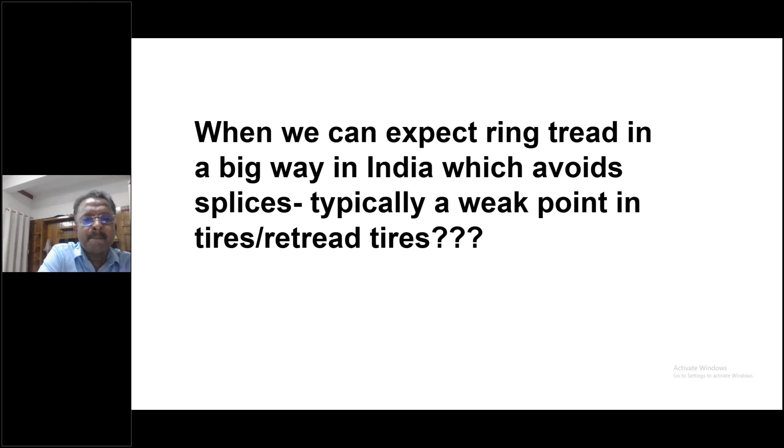Regarding anti-reversion agents, I use two kinds. One is silane - the silane coupling agent has anti-reversion properties. And Vulcuren is the best material for anti-reversion properties. Perkalink is also there, but Vulcuren is good - Vulcuren is the best. Silane also has anti-reversion properties, as does Perkalink, but Vulcuren is the best.

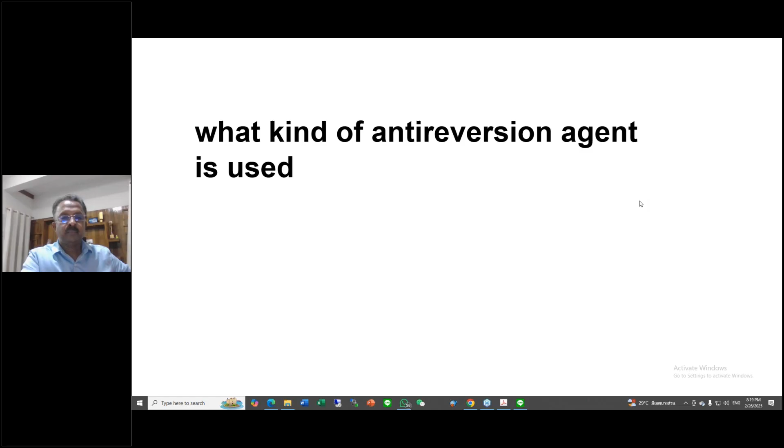For OTR tires, the most important properties are cut-chip resistance and heat resistance. For cut-chip resistance, we need natural rubber, which has good cut-chip resistance properties. Sometimes we need both cut-chip resistance and heat resistance together, especially for loaders in furnaces and blast furnaces - these need both properties. So we need a blend of natural rubber and SBR to provide both cut-chip resistance and heat resistance for OTR tires.

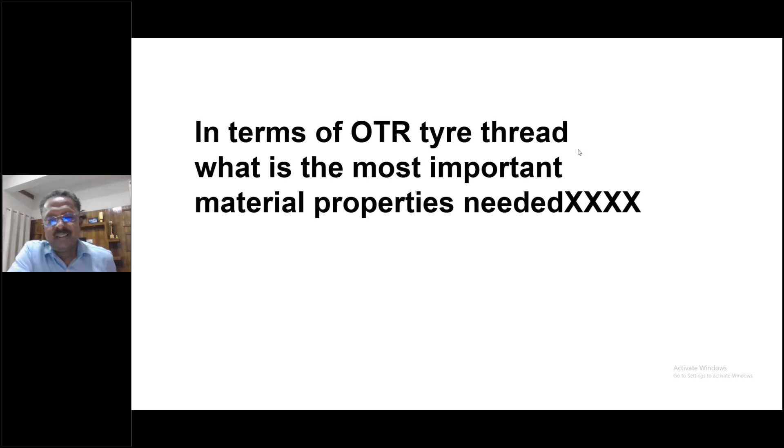Retreading is a very good option for increasing tire life. We can retread with good technology and achieve the same performance as new tires in terms of mileage, reliability, and safety.

There was even a research study conducted in America by a National Highway Traffic Safety Administration, and they found that retread rubbers are as good as new tires - there are no quality issues or reliability issues with retread tires. So retread tires have a very good future, and with extended producer responsibility legislation coming, the retread rubber future is good, provided the quality is good.

It's not a cheap product - we have to treat it as an alternative to a new tire. Then the future is good, the scope is good. So retreading is a good practice, even for environmental protection.